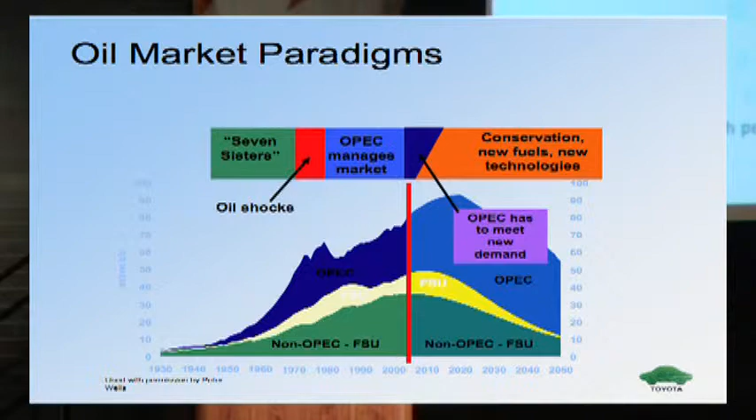In the good tradition of bringing coal to Newcastle, I'm going to show you some oil slides. I don't think you need to say too much about peak oil. We're working with Dr. Peter Wells, who I think is a really brilliant engineer from Scotland. And when we talk about peak oil, forget the timelines, because to me, they're not important.

What we're seeing is that the non-OPEC FSU production has already probably peaked right now. So geopolitically, we're shifting the responsibility for oil production to FSU, to Russia, and who knows what Putin's policies will be and what happens after he steps down, and into OPEC. So what we see is a series of rolling volatilities.

Perhaps the volatility in the market we're seeing today is because of the peak in non-OPEC FSU. Certainly we'll see another crisis or another volatility when Russia peaks or the FSU peaks somewhere in the next 10 years or so. And then the call on OPEC to meet the demand. They need somewhere around $2 to $3 trillion upstream. Is there the political stability to encourage that kind of investment? I don't know. But we're certainly going into a new paradigm and also into conservation and new fuels and technologies. I know you've all heard this all week.

And CO2. These are the various charts from the IPCC of where we're going to stabilize. I'm frankly quite pessimistic that we're going to stabilize anywhere around 550 ppm. I think that there's money that we should also spend to look at accommodation of the effects of climate change, and whether that means, for instance, our growing areas are shifting north. We might want to look at our land use policies in the coastal areas and areas like Boston and New York as well.

And so we see an increasing move. You saw it in Texas with 11 power plants just permitted down there. They're basically coal-fired power plants. There's nothing advanced about them. No carbon capture, sequestration, none of that. Hopefully we can have that, but until we do, relying on the electric industry to pull us out of a problem is trading one issue for another, and it's not a solution right yet.

So everybody wants the automobile industry to do something grand. Smaller cars, 50% fuel economy in 8 years. Well, who's going to buy the cars? We've got to balance the environmental impacts with consumer demand, okay? And there's 3 issues that we have to address here. One is we have to do the technology. Now, Toyota, Honda, and a bunch of companies, we're pretty bright boys at doing the technology.

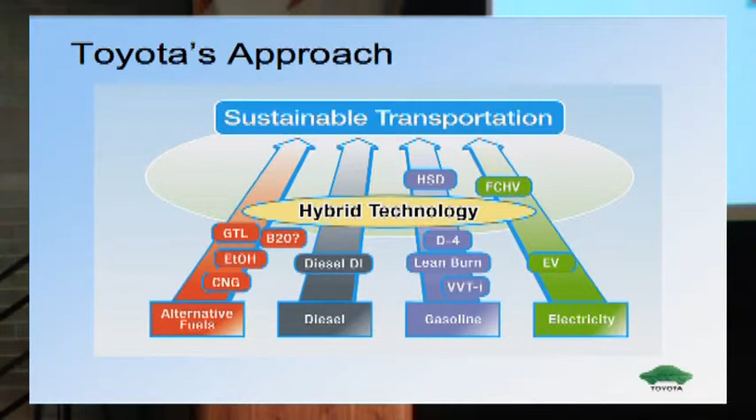But across all of this is hybrid technology, because we can increase the efficiency of a powertrain pretty readily with a hybrid technology, whether it's a fuel cell or a diesel or a gasoline vehicle. And that's a definition of a hybrid: two or more energy storage systems, both of which provide propulsion power. That's an SAE definition.

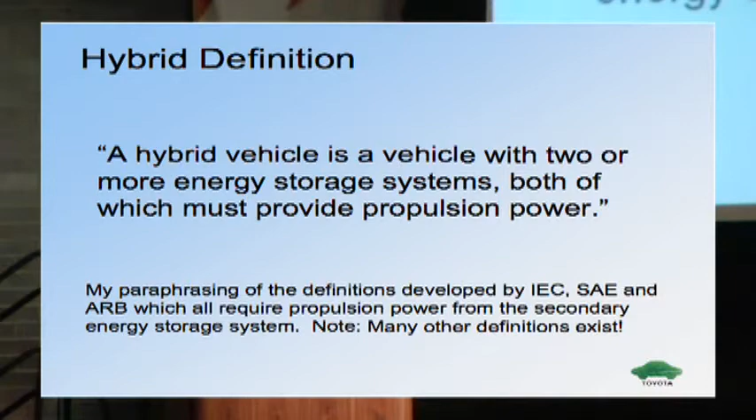Everybody wonders what Toyota's hybrid price is. Well, you can go figure that out now: just go model for model in the Camry hybrid versus the Camry LE, equip the cars similarly, and you'll see it's $2,000. I'll save you the math. And it's about a 5-year payback. Increasing the volume will lower the premium, and we have some unique attributes that also offset the premium.

A lot of people will be bringing hybrids to the market. Not all hybrids are equal. Toyota and Ford and Nissan use a battery-heavy approach that allows more flexibility, but it increases the cost. I'm not here to sell hybrids or Toyotas, but I will sell hybrids or Toyotas if you'd like, because I get a bonus.

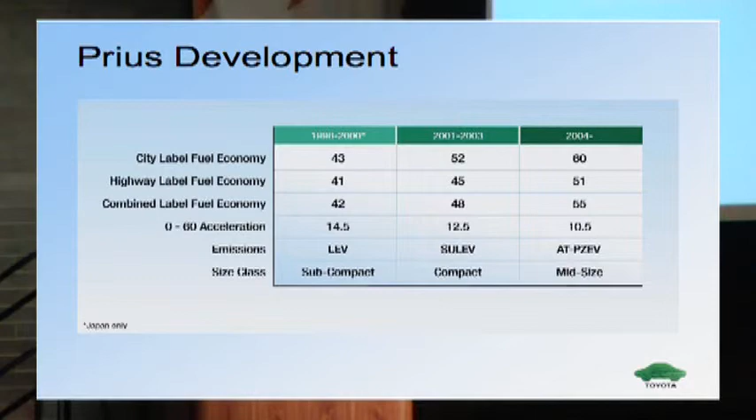But what I'm showing you here is essentially in 4 or 5 years, in one product cycle, we're able to increase the fuel economy and the performance by about 25%. And we've also increased the size of the car and decreased the emissions down to AT-PZEV. That's a California term: advanced technology partial zero emission vehicle; essentially our engines are non-detect under load. And that's in 5 years. Our next model cycle is 2008 for the Prius. You can do your own calculations and figure out what our target is for fuel economy.

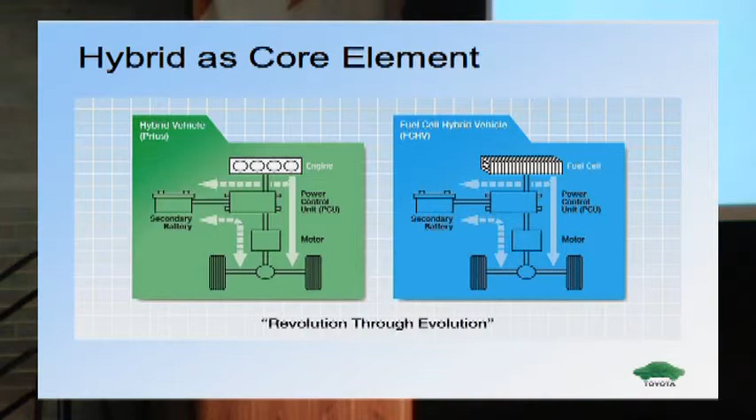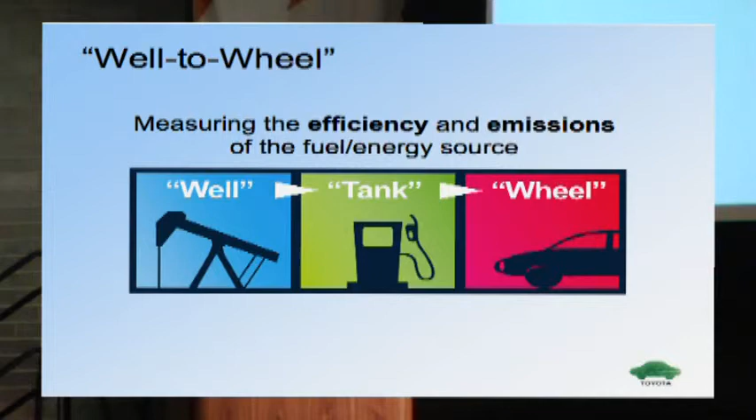As I say, hybrids are core elements for us. Essentially, we use the same hybrid technology in our Prius that we use in our fuel cell. In fact, we use some of the exact same components in both cars. This enables energy to move back and forth as we look at our electronic tuning and how our power electronics work. Okay, well-to-wheel. Everybody's talked well-to-wheel, and that means the energy from the well to the tank to the wheel. We've got a little different measure.

Right now, well-to-wheel is about driving the car. It's refining the fuel and the fuel consumption. We use life cycle assessment where we look at the carbon, or it could be NOx or whatever, from materials production to vehicle production, driving, maintenance, and finally disposal. And there's a lot that we can learn from that, and it's embodied in every Toyota that's made.

In fact, each chief engineer that works on a car has a carbon budget, just like they have a cash budget, and they can't exceed their carbon budget. So that's driving how we design our cars and what materials we use to put into them. Okay, so life cycle assessment, our inputs are natural resources and energy, and then our outputs are vehicle emissions, greenhouse gases, wastewater, waste solids, air pollution.

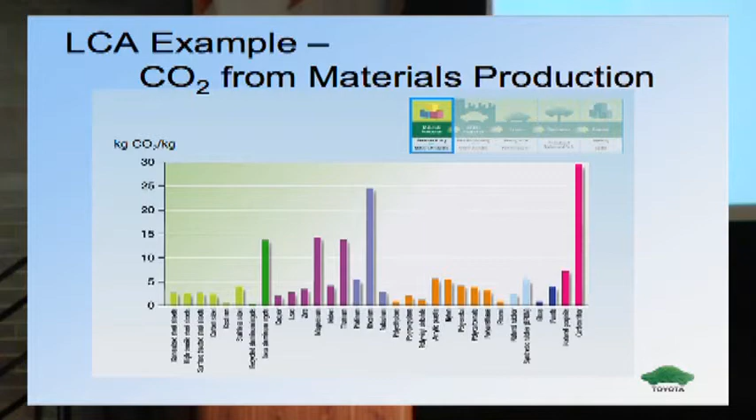I'll give you two examples. This is from materials production. You can see the big ones, the big stuff are the catalysts that we're using. And rhodium especially is a very big problem for us. And Amory Lovins likes to beat me up all the time because he says our cars are too heavy and we should be using carbon fiber.

And I keep talking to Amory about the life cycle of carbon fiber from the autoclave part. And as you can see, the CO2 that's generated during the processing of carbon fiber is never recovered in the use of the car. And also carbon fiber is not recyclable. So, that's the kind of stuff you learn when you start doing these exercises.

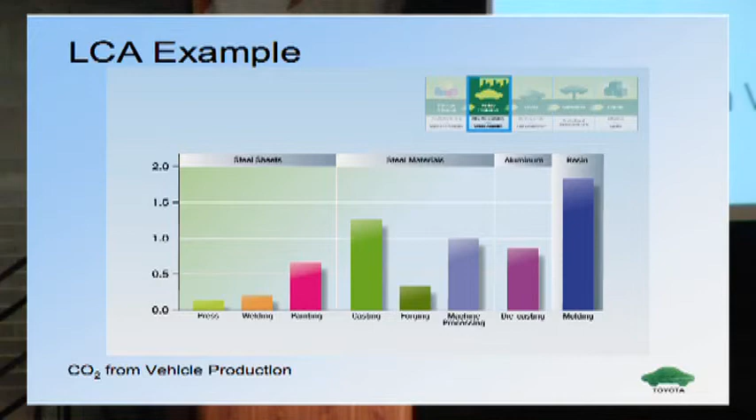And then another LCA, this is during production. You can see that actually working with metal, hammering out metal and welding it is much lower in carbon than molding plastics. So that's how we do it to get a complete picture of where we're headed.

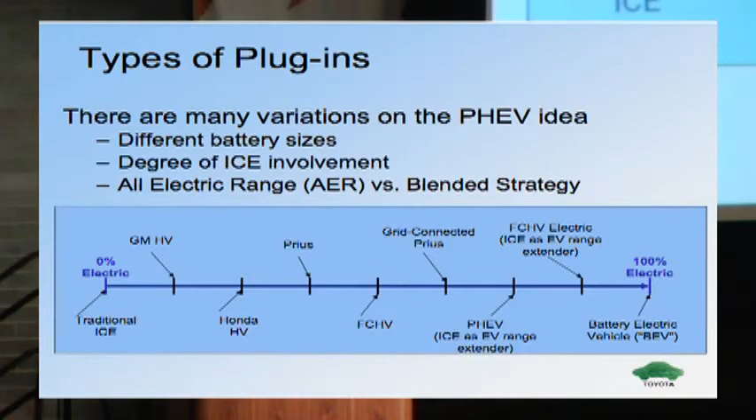Of course, what's next? Fuel cells some ways away, 10, 15, 20 years. Maybe longer than that. Plug-in hybrids nearer. There's many different kinds of plug-in hybrid, and Andy Frank's going to talk about those. So just basically, this is a continuum from 0 all the way up to 100% electric, and where we might use, there's a little typo there, where we might use a fuel cell as a range extender for a pure EV. And there's a lot of considerations we're looking at.

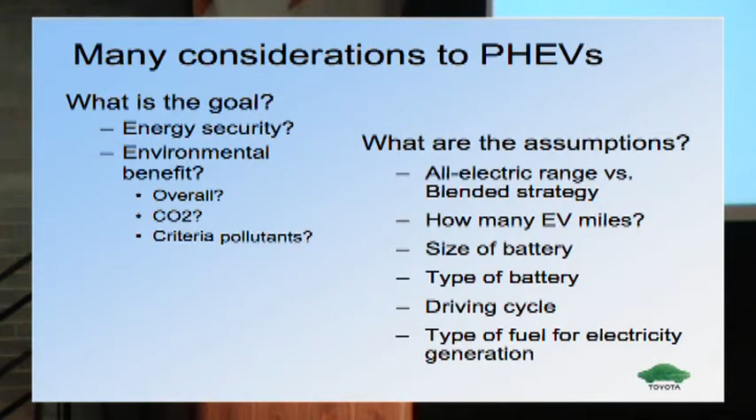The goal is energy security, environmental benefit, CO2, criteria pollutants, which way you want to balance the cars for that direction. And what are the basic assumptions? Are we going to use a blended electric range versus a switch that lets you go into EV? How many EV miles do we design for? What's the size or type of the battery? Right now we're having problems with lithium-ion batteries from a recycling point of view, and from survivability with wide charge swings.

What is a driving cycle? Plug-ins tend to be really optimized for urban cycles, but they're not so hot out on the freeway, where you're basically taking that extra weight and you're just dragging it along with you. And then what type of fuel for electrical generation? Again, we're somewhat pessimistic about the direction that the world electricity is going.

And keep in mind what John said. These plug-ins are not something that we're going to do for a few people here in Boston or for all of you guys. We've got to have millions and millions of cars on the road. So we've got to have something that works for millions and millions of people, and something that millions and millions of people are going to buy. And that's a long, hard road.

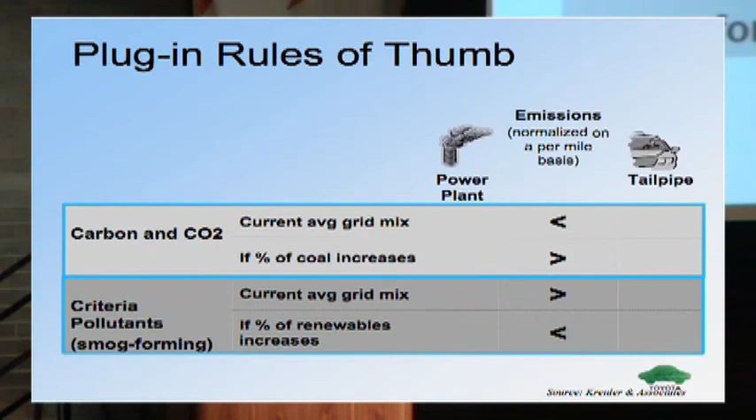And rules of thumb, I'm going to hurry up quickly here. Carbon and CO2. With our current average grid mix, we think that plug-in hybrids reduce CO2. If the percentage of coal increases, we think that plug-in hybrids will increase CO2, but that's our own calculations. I think that Argonne National Lab is a little bit different. Current grid mix with criteria pollutants. Right now plug-in hybrids might increase NOx, but if we have renewables, that will be taken care of.

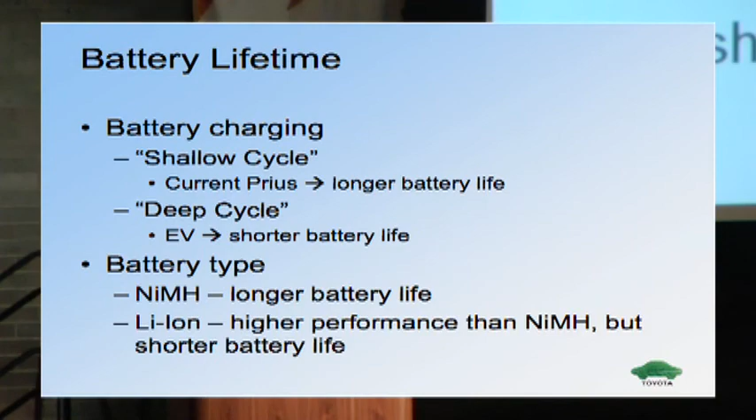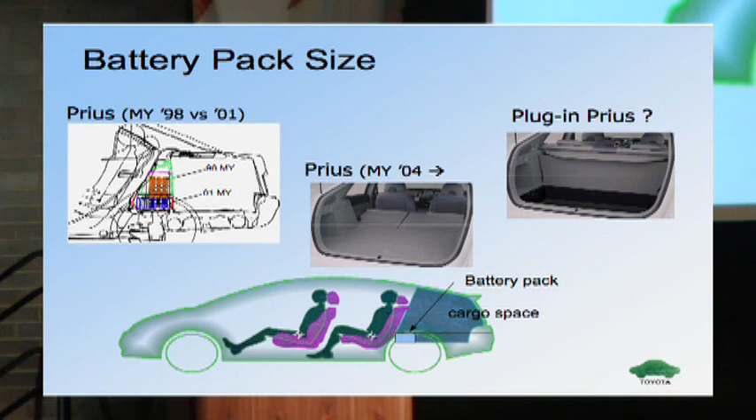Battery charging, as I told you, and nickel metal hydrides and lithium ions, but Andy will go into much more detail with that. And then this is something from Toyota, you can see the packaging space for the first hybrid, and then our battery got smaller. This is what we're looking at, our current Prius body as a plug-in.